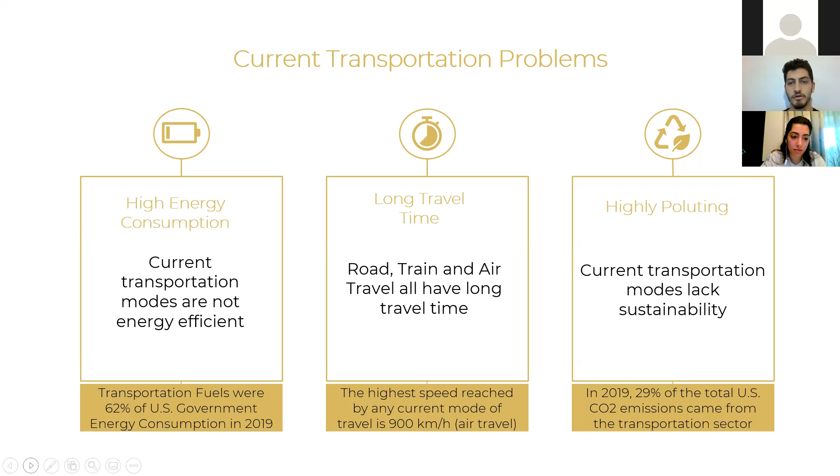Next slide, please. So in simple terms, Hyperloop is a high-speed mode of transportation based on magnetic levitation and powered by renewable energy. So the pods or capsules, as you can see, can move in tubes above or underground and can reach a travel speed of 1,200 kilometers per hour.

Okay, so as Guillaume said, Hyperloop is a new concept that emerged with Elon Musk in 2012 when he first published a technical white paper named Hyperloop Alpha. Hyperloop will carry its passengers in pods or capsules in a partial vacuum steel tube. That way, the two main reasons that slow down normal transportation are minimized, which are the rolling or contact friction and the air friction, which is the aerodynamic drag. This technology is very similar to Brunel's atmospheric railway, which operated between 1847 and 1848.

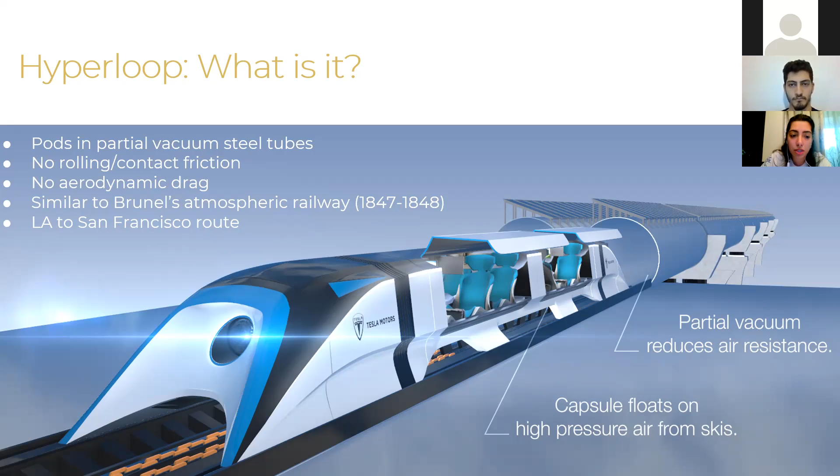And to put the speeds into perspective, for example, the Los Angeles to San Francisco route, which takes 8 hours by bus, 4 hours by train, 3 hours by plane, will only take 30 minutes via Hyperloop. So how does it work? First we will explain the concept of levitation. Levitation is divided into two main categories, which are magnetic levitation and air bearings technology. This technique will minimize the rolling or contact friction. In magnetic levitation, we have the electrodynamic suspension, the electromagnetic suspension, and the third technique is air bearings.

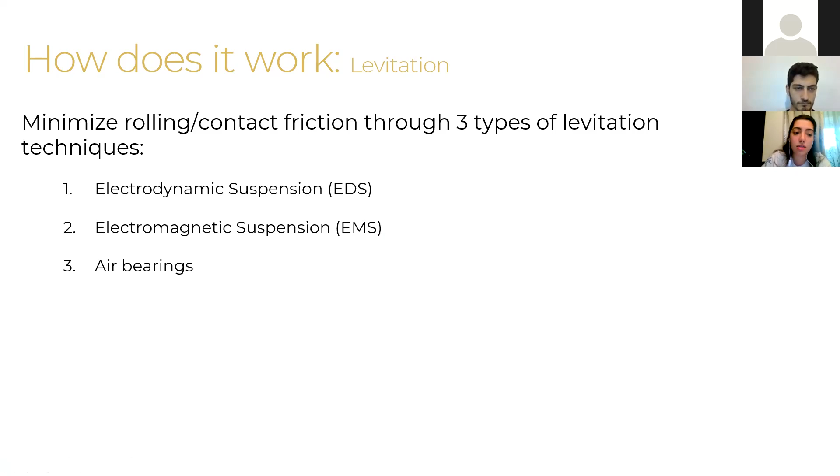So first for EDS, it is based on repulsive forces. We have permanent magnets located on the pod, and we have a conducting track. These magnets will create a magnetic field that will create eddy currents due to Faraday's law, and this will create a lift force lifting the pod above the track. For EMS, however, it is based on attractive forces. We have electromagnets on the pod and two conducting tracks. Also, the magnetic field will lift the pod and keep a distance between the pod and the two tracks, and this distance always has to be monitored.

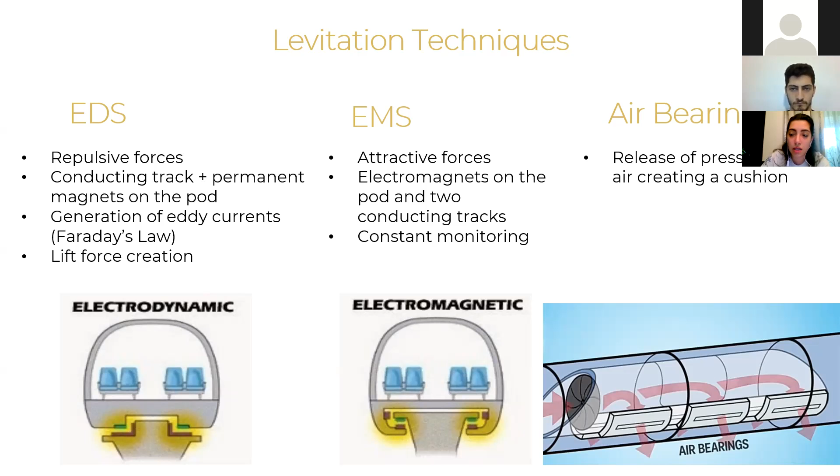Third is air bearings, which is, by the way, the technique that was suggested by Elon Musk, and it consists of releasing pressurized air, which will create a cushion on which the pod will be floating. Now, the pod has been lifted, but how does it move initially? The answer is through propulsion. Of course, there are many propulsion techniques in the literature and in research areas. However, the most famous one is the linear induction motor.

So we have electromagnets on the pod, which is the primary part, that will create a magnetic field on the guideway, which is the secondary part, that will generate a propelling force that will move the pod inside the tube. Second, the second kind of friction that has to be mitigated is the air friction or the aerodynamic drag. Ideally, you would have the pod moving in a vacuum environment. However, this is not possible. So we have to reduce the pressure as much as possible. But if the pressure is very low, and the gap between the capsule and the tube is very small, we will have choked flow. This is known as the Kantrowitz limit. And to mitigate this, Elon Musk suggested having compressors in front of the capsule in order not to have this choked flow.

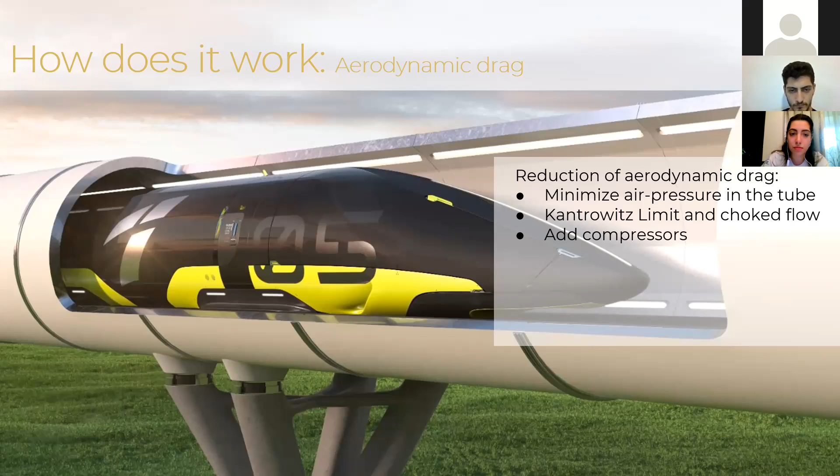Now, also for the design, we have many designs. Every company, every research team can suggest its own design, but here we will present the design that was suggested by Elon Musk in Hyperloop Alpha. So as you can see, we have a reduced frontal area of the capsule, and it will contain 28 passengers per capsule, for example. It can weigh approximately 15,000 kilograms, and it will have a surface area of 1.4 meters squared, excluding the propulsion and the suspension components. It will also require only 100 kilowatts to be driven and 320 Newtons of drag force. The capsule is intended to cost $1.35 million.

Now for the tube, it will be partially evacuated and it will be held by pillars. The tubes are intended to be prefabricated and then installed on the pillars. Then we have solar panels covering surfaces of the tube that will generate power, and this will cost $4.06 billion.

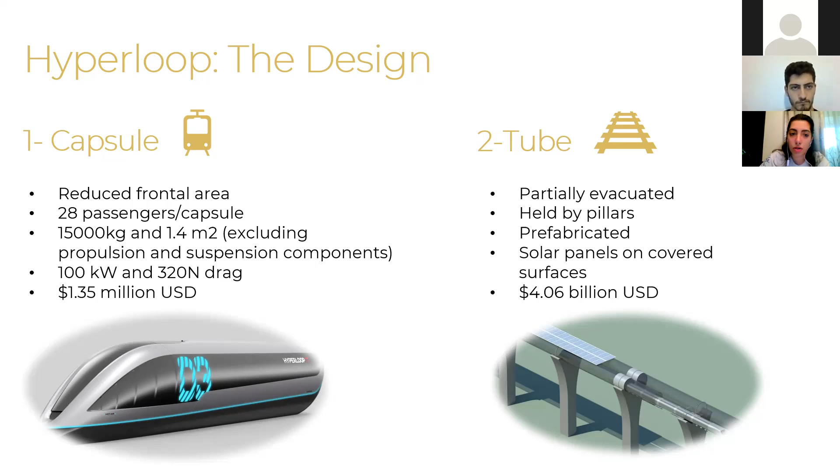Okay, so Noor talked about the technology and how it works in theory. Now we'll be talking about the current state of Hyperloop. So Hyperloop in 2012 experienced an accelerated growth and gained a lot in popularity because of Elon Musk when he introduced Hyperloop Alpha, which is the first project that was implemented, like the first prototype, and he did not file for a patent. So he made his finding accessible for everyone.

And this is when many stakeholders and multiple organizations invested their resources in researching and developing the initial model. So mainly, we have the main stakeholders, Hyperloop TT and Virgin Hyperloop in the US, Zeleros and Hardt in Europe, and many others. Over the years, many research and testing were conducted. The maximum tested speed was 1019 kilometers per hour. It was reached by KRRI in Korea, and the complete full-scale testing of a Hyperloop model was conducted in 2017 with Virgin Hyperloop.

So many concrete projects emerged after that. Mainly, we have the Ohio-Chicago route. We will be talking about it later on. It was conducted by MORPC, and it's a full feasibility study in America. And the Dubai-Abu Dhabi route by Virgin Hyperloop, which is almost ready to be fully implemented. Next slide, please.

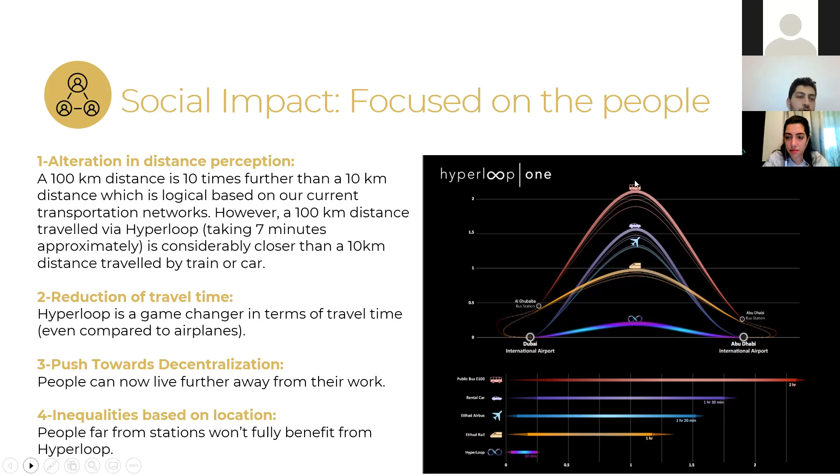Next slide. Now moving on to the economic impact, because any new technology should be economically viable in order to be implemented.

Yeah. Yes. Can you try to change your place because the voice is not very clear? When Noor is talking, the voice is much clearer. Can you please try to change your place? Is it better now? Yes, better.

So it's designed to serve countries, a whole country for many years. Now, to talk about the impact on the economy, we have both direct and indirect impact. I'll start with the direct impact.

So Hyperloop will increase travel time savings. This is calculated by estimating the shift in ridership volume. So in simple terms, it's estimating how many people will shift from cars and train to Hyperloop. So you'll get a value of the time saved in hours or in time unit. And then we can convert this time unit to dollar unit to quantify it. This basically involves assuming how much the time of people is worth in dollars.

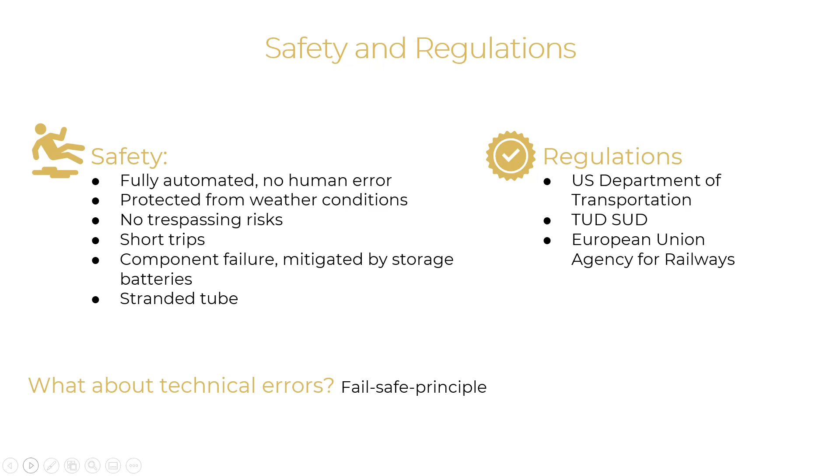Now, what about the regulations? For example, the US Department of Transportation, TÜV, which is a trusted agent in Europe for safety, and the European Union Agency for Railways have already submitted standards. However, further work is called upon.

Now, what are the technical difficulties that Hyperloop faces? First, the slow progress. In fact, only 2 companies are making significant advances consistently in the technology, and they are Virgin Hyperloop and Hyperloop TT. Still, these companies did not achieve the promised performance, and this is due to financing.

Second, Hyperloop is facing many difficulties on the technical side. Desired speeds are not met yet, and as can be drawn, it is very costly to ensure safety. Maintenance is also a problem, and it is more costly for Hyperloop than other similar modes of transportation. The vacuum tubes have not been realized yet, and the heat losses due to propulsion have not been managed yet.

Okay, so now I'll be talking about the future of the technology, Vision 2050, and what are the required steps to make Hyperloop a reality.

Please, next slide, Noor.

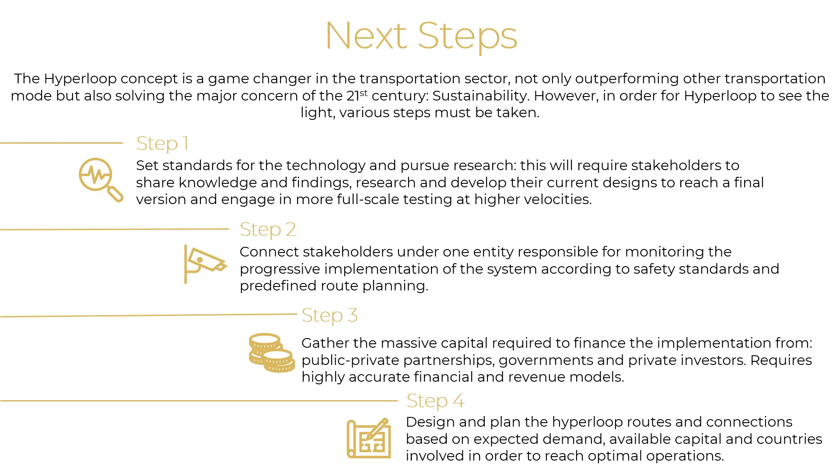Lastly, and this is after securing the funds, parties involved should design and plan the routes and connections based on multiple factors like the demand and the funding available, in order to identify the optimal route to connect stations in the most efficient way. So that's it from our side. If you have any questions, please go ahead.

Okay, thank you. First, anyone wants to ask questions? Yes, I have 2 questions actually, if I can. Yes, what's your name? Adi. Yeah, please go for it. Okay, so my first question is, does it only operate on straight roads or rails, or can it be implemented in different geographies?

Okay, I will take that question. So, Ghadi, it can operate on various roads, but can you please mute your mic? There's echo. Sorry. Okay, so the more the roads are challenging, the more the physics are challenging. So let's say you have turns or strong wind or stuff like that. It will be more difficult to implement Hyperloop.

Until now, we did not say that anything is impossible or possible. However, as I said, you have to cut down trees, you have to construct pillars. So it's not like you can build it anywhere, but nothing is impossible. It will only involve more cost and more difficult physics. Okay, thank you. And can I ask one more question, Professor? Yes, sure.

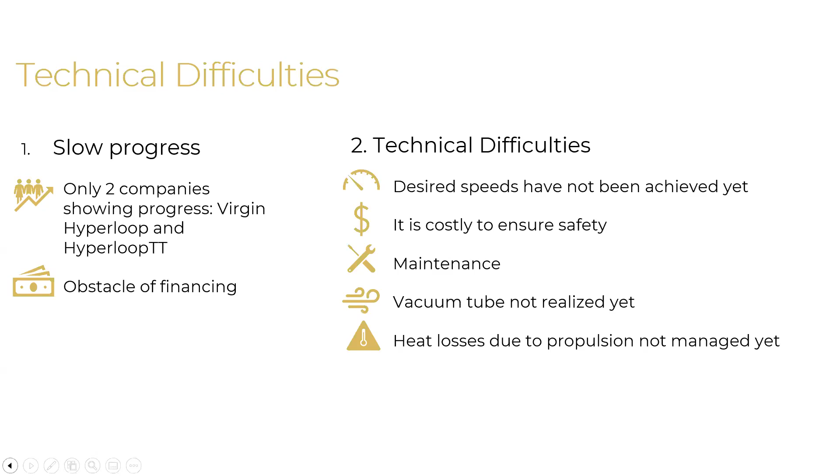EMS, electromagnetic suspension, is also based on magnetic field generation and Faraday's law. However, we have two conducting tracks and it operates on attractive forces. So the pod will be lifted up, and we also have constant monitoring of the distance, and this makes the motion for the electromagnetic suspension not stable, so it is not preferred. And the third one is air bearings, which is the innovation now.